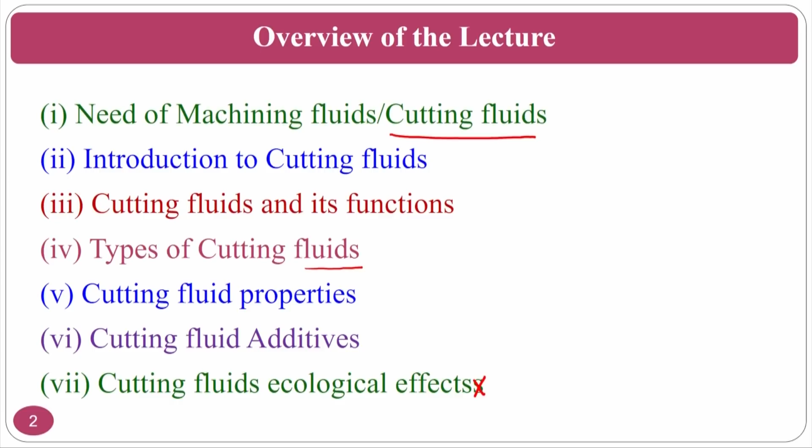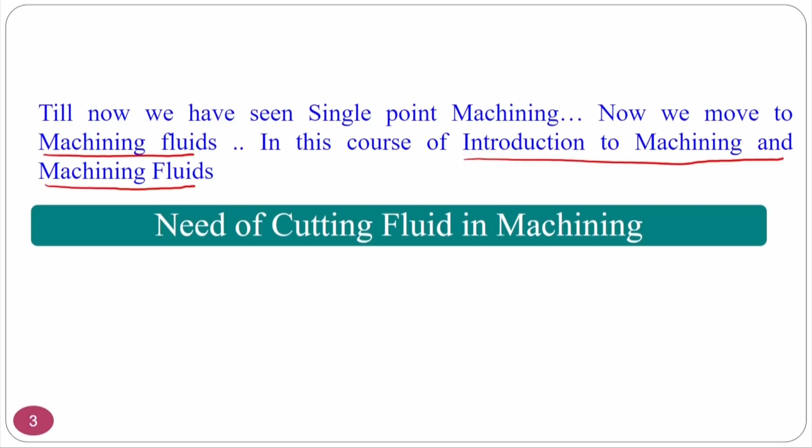So till now we have seen the single point machining tool, and now we are moving to machining fluids. As I just said, this course itself is titled introduction to machining and machining fluids. So it is my responsibility to give you slightly extra knowledge about machining fluids compared to how a mechanical engineer or manufacturing engineer looks at that perspective.

Need of cutting fluid in machining - what is the need of cutting fluid in machining? The basic problem in machining is heat generation. As we have seen the thermal aspects of machining, during machining of metals or non-metals, considerable heat is generated when mechanical energy converts into heat energy.

Severe plastic deformation takes place - you can see this is the primary shear zone, where severe plastic deformation is taking place and mechanical energy is converting into heat energy. So there are three zones where heat generates. One is heat in the shearing zone, which is the major amount of heat generated.

For which you are using the cutting fluid to extract the heat. Heat in chip-tool interface - we have already seen heat takes place at the chip-tool interface because of two things. One is the chip carrying the plastic deformation zone's temperature, and at the same time, frictional heat between the tool rake surface and chip bottom side also causes heat.

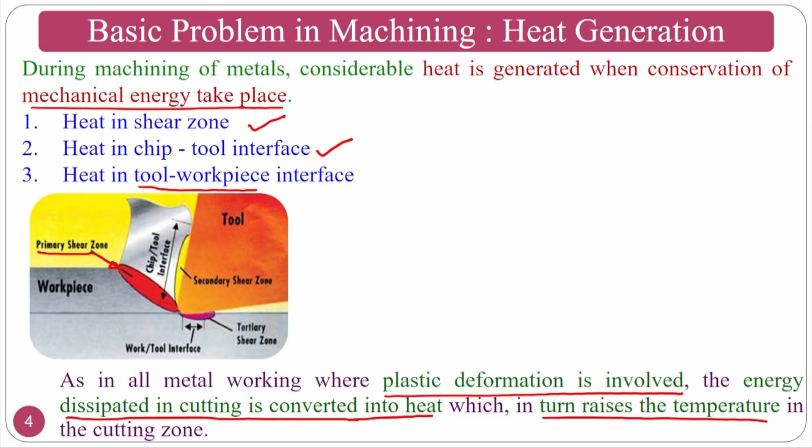How does it raise? I might have already shown this video, but since it is an apt video for this cutting fluid application, I will go and show you again. You see how the fireworks take place in this one.

If you see here, what is happening is the machining is taking place at extreme conditions on a hard workpiece. What is happening here is, if you see in this video, a lot of heat is generating. Not only is heat generating, but the chips are coming like firing bullets.

At the same time, there is an accumulation of hot chips, which is a continuous chip in that location. That is very harmful because your final product is coming in this direction. If a chip is entangled there, it disturbs my final surface roughness, plus it also gives heat input because the chip is red hot, giving heat to the workpiece, which damages the microstructure on the surface. That is two disadvantages. How to overcome all these things, we will see in the cutting fluid applications.

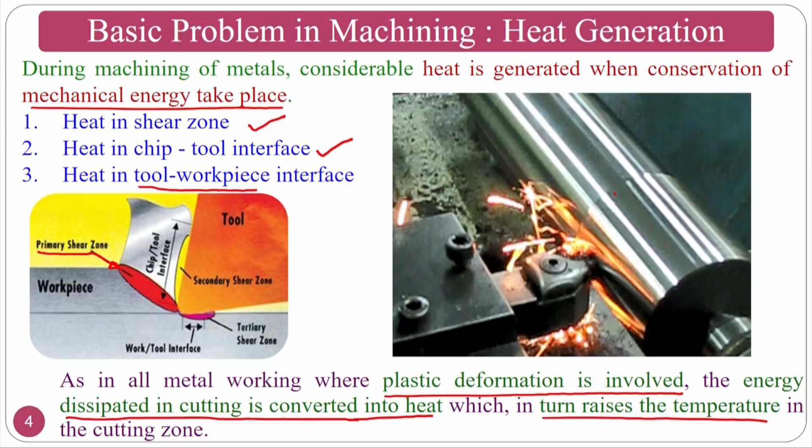At the end also, the same thing is clearly visible - there is a continuous red hot chip there. If these type of chips are present, this disturbs the surface morphology as well as the metallurgy, which we have studied in last week's courses. How do we eradicate or minimize all these things?

For that purpose, we will use cutting fluids, or you can go for another alternative. You can go for hard cutting tools, which may increase the cost of production. So the cheapest or most economical way to go ahead is cutting fluids. That's why there is a need for cutting fluids.

Proper methods are needed for these type of things - how you have to utilize the cutting fluid. You cannot throw it like a mad person; you should usefully utilize it, thinking about how to send it. If you see here, figure A is a good way and this is the poor way. Why? The heat is generated in this region where the chip-tool interface is there. At the same time, in the good way also, if it would have been done at certain degrees...

Recent studies show that if you send it at 45 degrees, that will be better - this was conveyed by some researchers. So it may be better. Whatever is given is good, but what you can go ahead with is better. So this would be better. I am not saying the best, but it would be better.

The poor way - why is it poor? Because the cutting fluid is falling ahead of my machining region, which is not required for us. At the same time, if you see in the good way, there is cutting fluid application from the flank surface side also, where the workpiece rubs against the clearance surface, flank surface, or relief surface.

Here, what you normally send is a lubricant-based cutting fluid, sent to the flank surface. In the good one, at the chip-tool interface, you send a coolant type. This is because temperature extraction should happen from the top side, and abrasion is dominating on the bottom side. That's why you always go for a better lubricant, so that lubrication is done, as you have seen in the tribological lubrication and all those things.

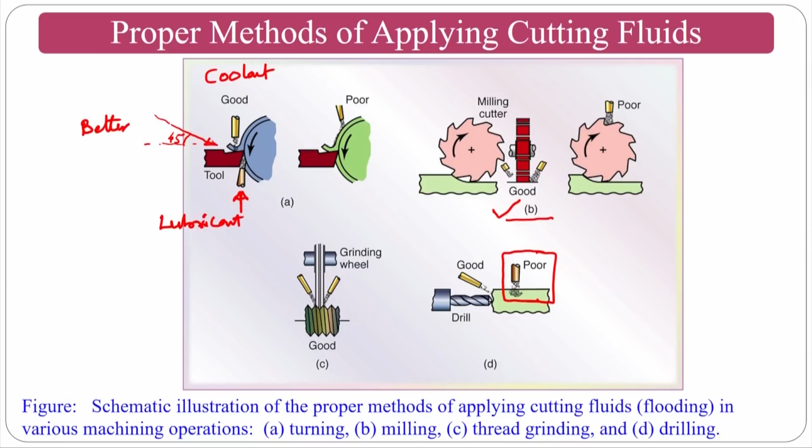So if you can send through the flutes or in the machining region, what will happen? It will lubricate, it will cool, as well as an additional effect in the drilling process is it will try to evacuate the chips. That is the beauty and the third function of the cutting fluid.

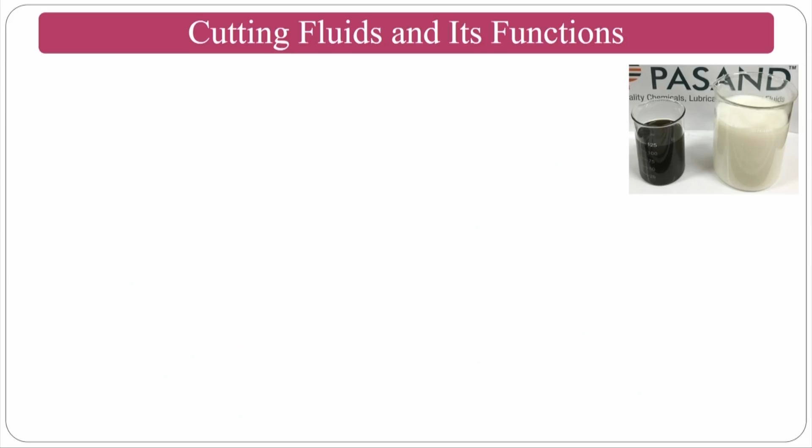In detail, functions we will come across in this lecture about the cutting fluid and its requirements and all those things. As I was just telling, now we come across the purpose of the cutting fluids, and they are none other than its functions.

So the first and foremost function normally depends on the manufacturing process that you are choosing, either it can be lubricant function or coolant function. This has equal choices or equal importance basically, because if you are going for low speeds, lubricant type is required. If you are going for high speeds, normally the coolant type is required.

So lubricant type normally will reduce the friction and wear in the machining region, about the tool.

If at all I am using the coolant, what will happen? It will cool the machining region. That means it will try to cool the chip, it will try to cool the tool, and it will try to cool the workpiece also, which is carrying a certain amount of heat.

So if you are cooling and doing all those things, what will happen? The other benefit that you are going to achieve is reduced forces. If you reduce the forces, the energy consumption will be less. That is Fc into V, normally it will go down. So your energy requirement or power input will obviously go down.

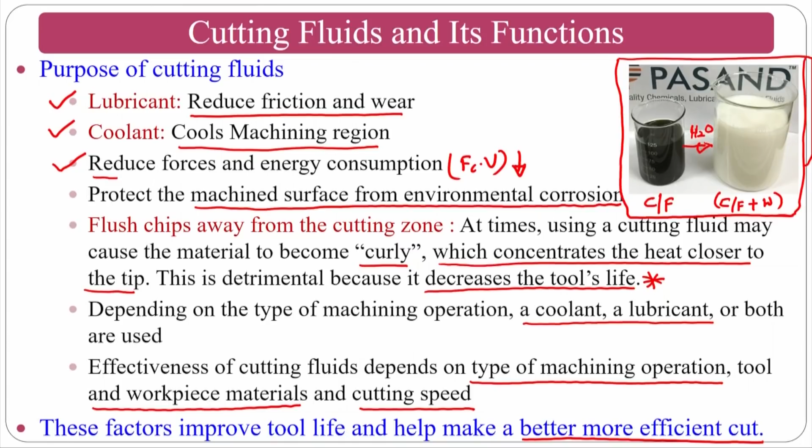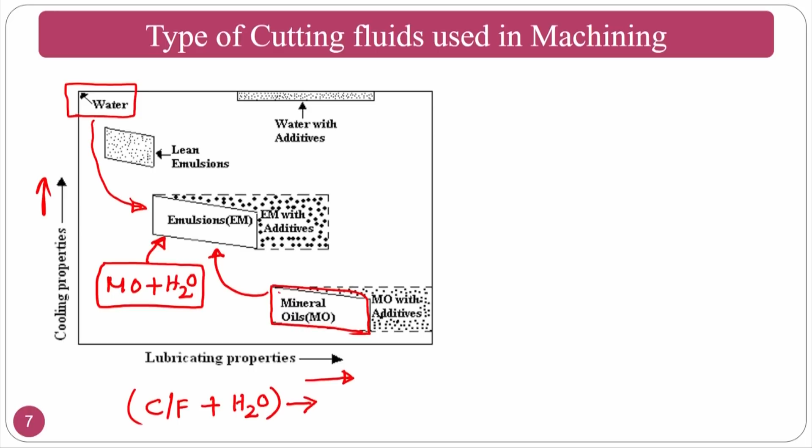Just now I told you, if you have a cutting fluid, you always add water to it. Whenever you are adding water, you are improving the cooling properties. Why? The proof from the literature is that water is a better cooling property liquid, and mineral oil - or the lubricant you get from the market - is a better lubricant. So if you want both, you have to make emulsions. What you do is take mineral oil and add H2O to it, and you are going to get emulsions, which will have optimum cooling properties as well as optimum lubricating properties.

This will have cooling properties plus lubricating properties, both. If you choose mineral oil, it will have a lubricating property. If you choose water, it will have a cooling property. That's why, to optimize both things, if I require both cooling and lubrication in my machining operation, then I am going to use emulsions.

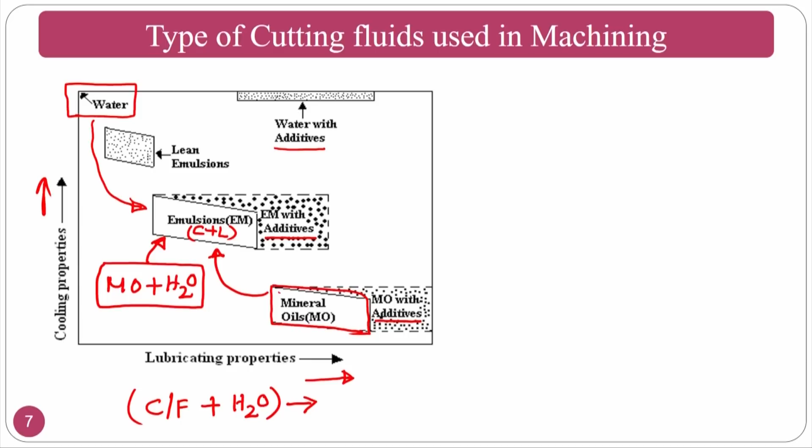Cooling plus lubrication - so emulsions contain water. If emulsions contain water, whenever high temperature machining takes place, the water will react with iron-based workpieces and cause rust. For that purpose, you always add some additives. You can see here, there are always additives - mineral oil with additives, emulsions with additives, water with additives, and others. What are these additives? That is the major thing we are going to see here.

Some of the additives are biocides, which help prevent microorganisms. Rust inhibitors help prevent rusting, as we have seen in the previous slide. Anti-wear additives help with better lubrication. Extreme pressure additives, at extremely high loads, provide lubricity for proper lubrication. The pressures are much higher in broaching operations and other processes. How additives help for better lubrication at those pressures is what we will see.

Regarding this, as I said, we will see this slide again in upcoming classes, because this graph has great importance from the point of view of lubrication as well as cooling.

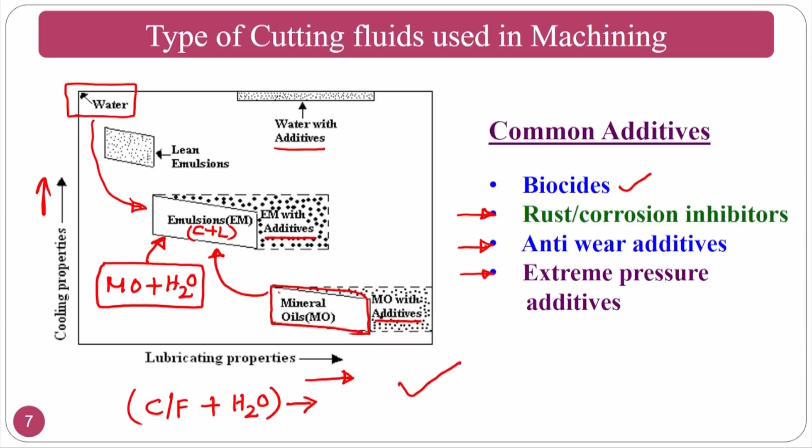The cutting fluid types - normally one is the oil type, where you see petroleum. Nowadays companies like Servo supply Servocut, which is one of the oils - these are all mineral oils. Animal, vegetable, compound - a lot of oils are there. Then emulsions - I will show you the emulsions. Emulsions are nothing but the mixture of oil and water along with additives that you have seen in the previous slide. They are good for operations where the temperature rise is significant, because they also cool.

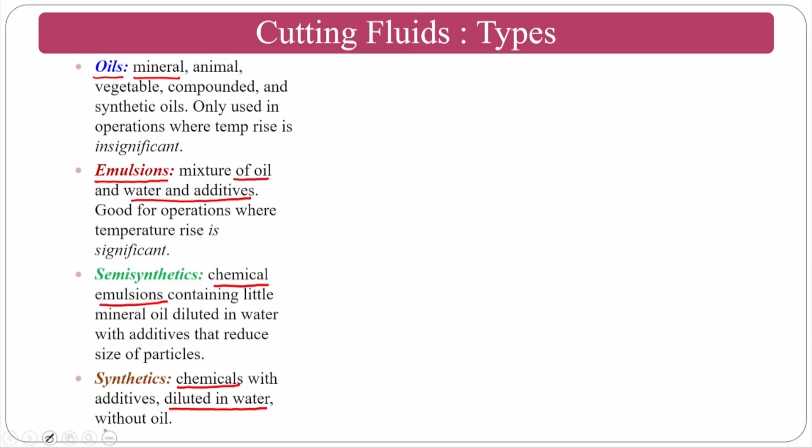Semi-synthetic fluids are chemical emulsions containing mineral oil diluted in water with additives to reduce particle size. The earlier ones are mineral oil based or water based emulsions. These semi-synthetic ones use synthetic chemicals with additives directly, along with emulsions, and you can even dilute with water or without oil.

So if you see the range of cutting fluids, as shown in the previous slide, water is a better cooling fluid. Soluble oils normally mix easily with water, that's why they're called soluble oils.

Straight oils normally have a very large chain, compared to small or medium chains, with chemical compositions like alkanes, alkenes, alkynes. If the chain goes beyond C30, the main branch dominates while the side branches are not as dominant. These types of oils are one kind of straight oil.

Mixed oils are where you can mix two to three varieties of oils. Chemical additive oils, as I said, are semi-synthetic, where you add chemically synthesized oils along with mineral oils and chemical compounds directly. Synthetic oils are completely chemical compounds where you can add water to make a slight emulsion.

And there are solid lubricants, which are normally nanoparticles or microparticles, used along with compressed air.

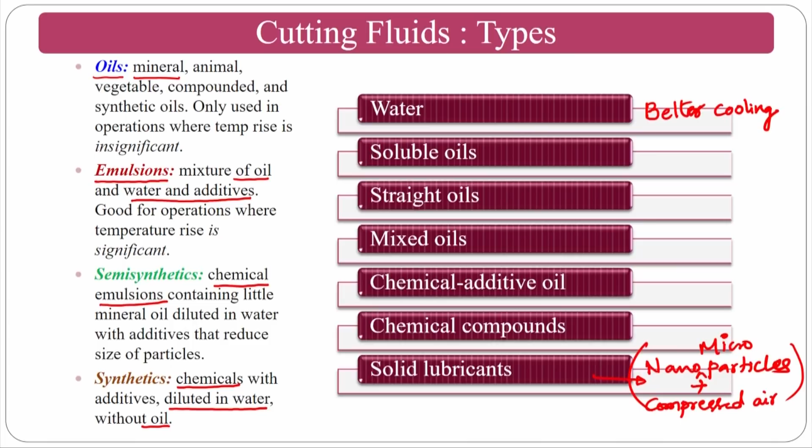With this, you send it to the machining region and get the lubricant effect. Here, the lubricant action is dominant compared to the cooling action, so whatever cold compressed air you send will be better. So whenever someone wants to do research in this area, you can use solid lubricant along with cooling fluid, that is cooling gas or normally air.

Cooled air can be impregnated with solid nanoparticles, which are better lubricants, and sent to the machining region. Your cooling fluid will extract heat because it's at low temperature, and being air, it can penetrate into the region. Very little work has been done in this area.

So people working on solid lubricants for machining applications can try low temperature, high pressure air mixed with solid lubricants, send it to the machining region, and check the results. You can even compare with normal air, and vary the solid lubricant particles as well.

Sometimes the problem is that whenever you go for nanoparticles, agglomeration is an issue. So you have to optimize the particle size, the volume or discharge of particles you are sending, the temperature of the air fluid, and the air pressure, all of which affect the volume discharge. There are a lot of interaction factors involved.

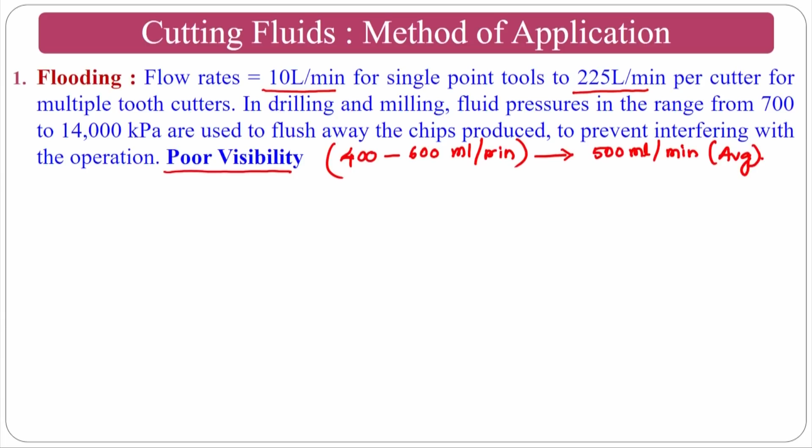Okay, so the basic problem is poor visibility. As you have seen, the cutting fluid is extremely milky type, so it will cover. If the fluid content is very high, you cannot see the machining region. That is the basic problem. At the same time, when cutting fluid is very high, emissions are also very high. Whenever you see in the next classes, you will really see what the basic problems are.

So the second one is the mist cooling, where you have a better visibility. What I mean to say is, better visibility doesn't mean it is transparent or something. Here you will mix the cutting fluid with gas and send it atomized, as you have seen in MQL, one of the synonyms for minimum quantity lubrication, where you send air plus cutting fluid and circulate it into the grinding operation or machining operation, any type of machining operation. This is the most popular one nowadays. Abroad nations are following it, and hopefully some companies in India are following it too, where good visibility is there, so people can see what is happening in the machining region and whether tool wear is taking place, and how the progress of tool wear is taking place and all those things. Some things you can see, if not 100%.

So the third one is high pressure systems, that is, if you want to send the cutting fluid with high pressure, normally you will go for this one. Here the cutting fluid consumption will be very high, even compared to flood cooling. Your flood cooling, I said 400 to 600 ml; here it may even cross 1 liter. And the beauty about this one is, if you are sending a liquid jet with high pressure, the premature chip coming from the machining region may break. That's why it will also act as a chip breaker. That is one of the advantages of this high pressure liquid jet that you are sending. At the same time, it will also clear the debris, if there is any formation in the machining region or in the chip-tool interface and all those things. This is the additional benefit one can get.

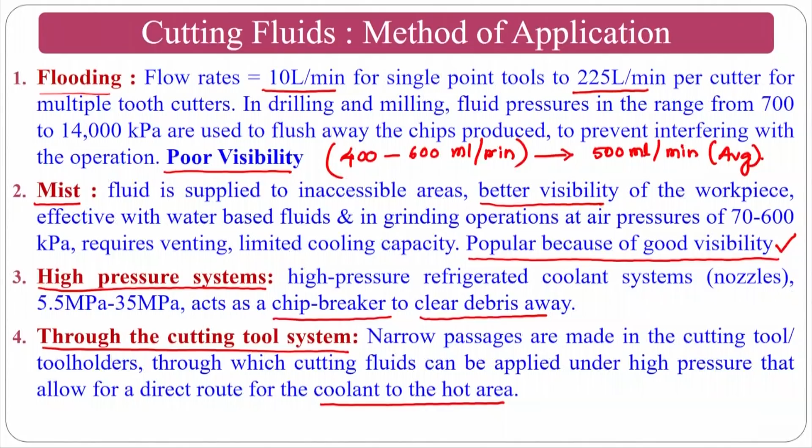Okay, these are the 4 techniques: flood cooling, mist cooling (that is minimum quantity cutting fluid or minimum quantity lubrication), high pressure systems (that is high pressure cutting fluid application), and through the cutting tool system. As I said, the through cutting tool system can normally work with high pressure cutting fluid systems only, because the narrow holes made on the tool as well as toolholder require a certain pumping system which you fit externally. Okay, so that is what you want.

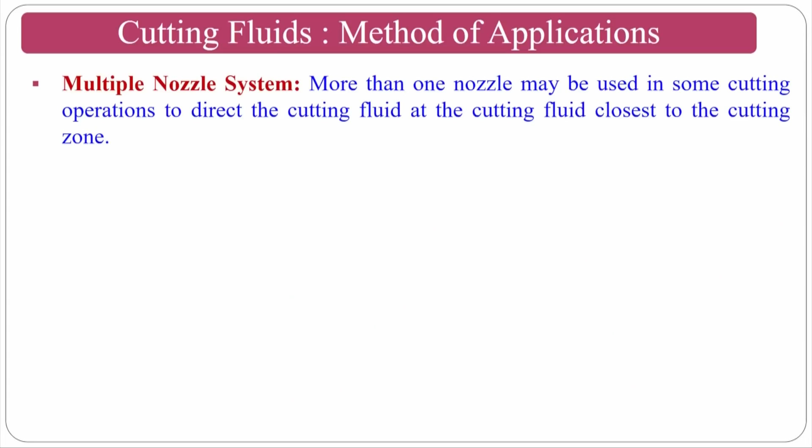So, methods of application: if you see the multiple nozzle system, normally this is another way of system. Since we have seen 4 systems, if the machining is for a long time, and if you are cutting large structures like aerospace structures or other big structures, there you normally require multiple nozzles to cool your tool. More than one nozzle may be used for some cutting operations. So that is what you can see here, a single nozzle system, and you can see a multi nozzle system, normally depending on your cutter size also. Whenever you are cutting very big aerostructures, like plane wings and those things, there you require the tool should not break at the middle or something, so you need multi jets. Not only that, whenever you cut advanced materials, normally you require multi jets.

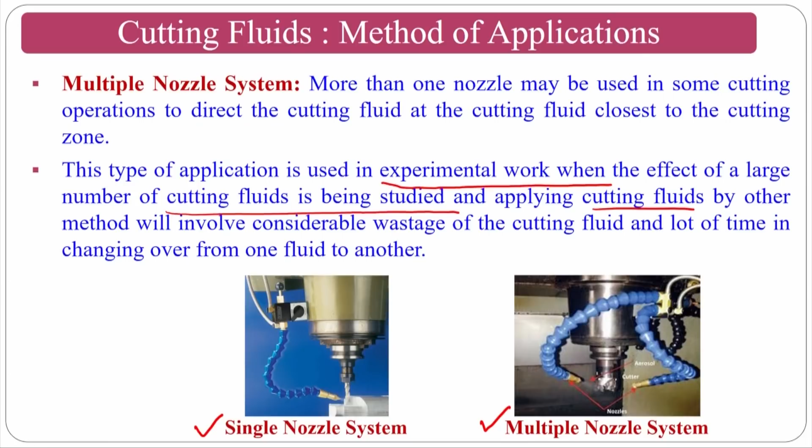This type of application is used for experimental work, when the effect of a large number of cutting fluids is being studied and applied to the tool. This is one of the techniques; apart from that, nothing much to it, only that multi jets are there. If you have different types of cutting fluids, you can also try so that a mixture of cutting fluids will be there. This has nothing to do directly with the main setup, but I am just guessing and explaining that if you have multi tanks and multi pumps where the nozzle is an individual entity, you just pump different types of cutting fluids, and you can get the forces, tribological aspect, surface finish and all those things. That also can be taken up as research, and you can do it.

Okay, so some special considerations are there. If you are machining certain materials, you should not use this type of chemicals. If you are using this type of chemicals, use them in a closed system, don't use in an open system, because it will affect things. There are special considerations to keep in mind.

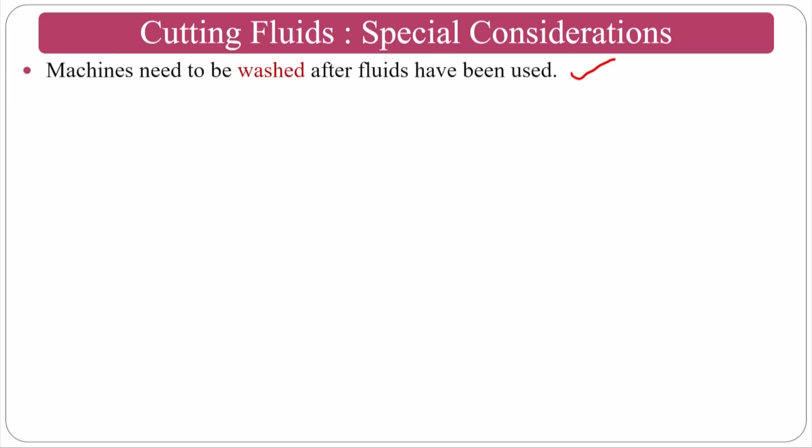Machines need to be washed after the fluids have been used. This is a primary requirement, because cutting fluid viscosities differ between fluids. If the cutting fluid has a very high viscosity, it is very difficult to wash off, so you need regular washing. If I have taken my lunch, I have to clean my plate as soon as I complete it, so that it is easily cleaned. If you clean it after 1 or 2 days, what will happen? It will dry, so it will be very difficult to clean. That's why you should wash as soon as you use it.

Cutting fluids may undergo chemical changes. Cutting fluids are normally mineral oil based, which are chemical compounds or carbon compounds like alkene, alkyne. Whenever these fall in the high temperature region, chemical cracking takes place, and the fluid's originality is lost. Its cooling property and lubrication property will be disrupted, because it changes its chemical structure.

Settling, skimming, centrifuging and filtering help to avoid these bad effects. If you can filter it - assume that while machining is going on, machining particles will come in contact with the cutting fluid and have a chemical reaction with it. That's why you should always have some filtering, and you can even use centrifuging to separate the particles out.

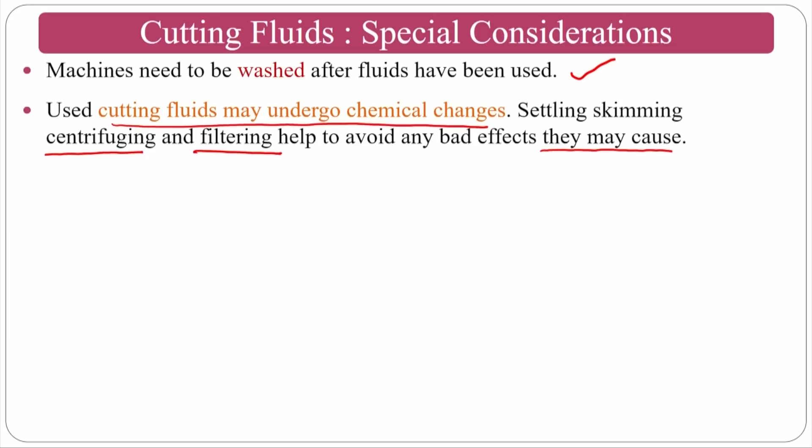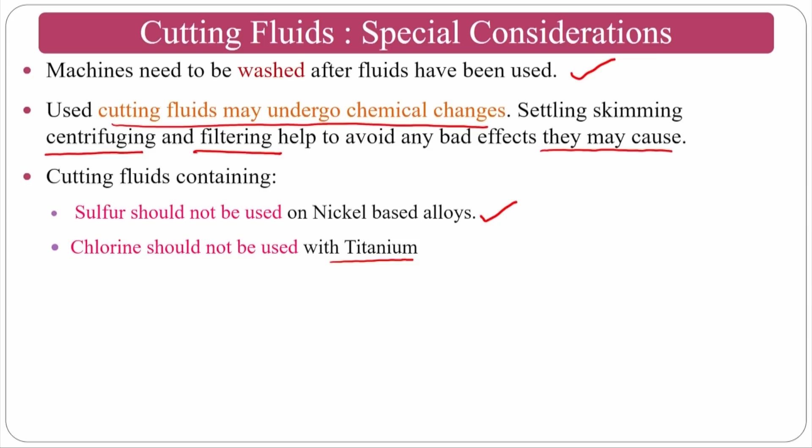Cutting fluid containing sulfur should not be used for nickel based alloys. This is one of the precautionary indications that cutting fluid suppliers will always give. If I want to machine nickel based alloys, they will give a different cutting fluid. Chlorine should not be used for titanium, because there is a chemical affinity between these two that causes a reaction. That's why it is normally preferred not to use chlorine with respect to titanium.

Situations in which cutting fluids are harmful are normally interrupted cuttings. In interrupted cutting, there are thermal shocks and mechanical shocks. So the cutting fluid may not act properly, because it has a sudden quenching effect on the cutting tool, but the sudden thermal shocks cause temperature to increase and decrease instantaneously. That is one of the reasons.

Apart from this, there are other reasons some textbooks give. In interrupted cutting, you normally have to use some other cutting fluids, which may cause the chip to curl, thus concentrating stresses closer to the tool tip. Sometimes it will cause this - if the chip is curling there itself, your nozzle direction or sending direction should not assist the existing curl. This concentrates heat closer to the tip, which reduces tool life.

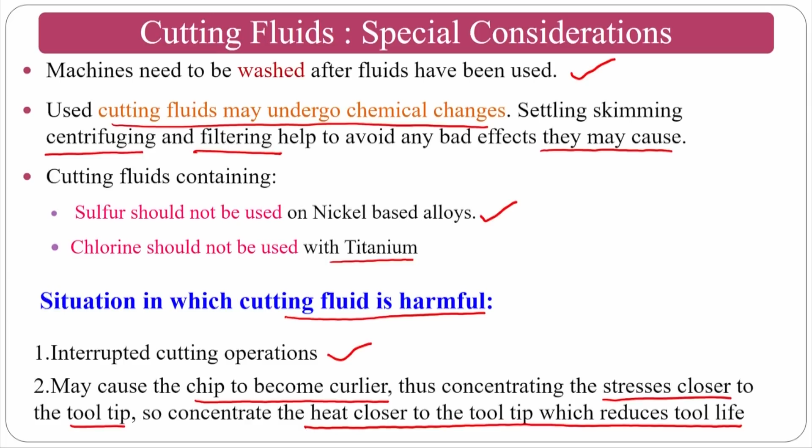So what I mean is, in these two situations, you should avoid bringing thermal shock or mechanical shock while also impinging fluid at very high velocity, because it will have an erosion effect. Another situation is if my chip is curling there itself - if you assist it by putting the cutting fluid in the wrong direction, it is not good. You should direct it such a way that it lifts off and sends the chip out. That is most important.

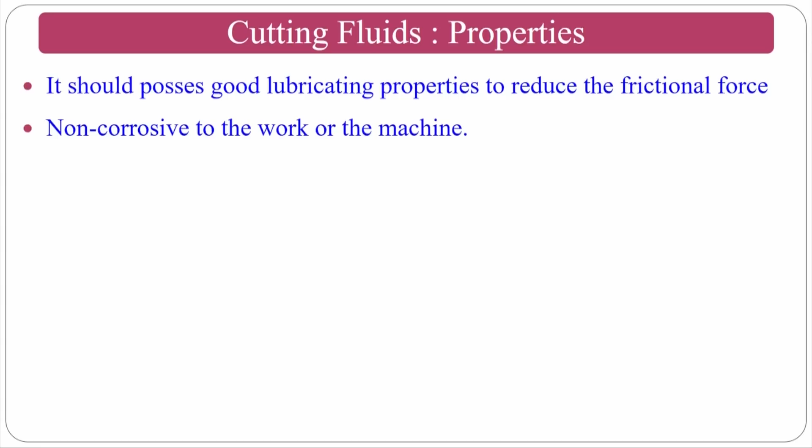Now we will look into the properties. What are the properties that I am looking for? It should possess good lubricating properties to reduce friction, which we have seen. Non-corrosiveness - that is, rust inhibitors should be built in whenever suppliers of the cutting fluid supply it - and it should be natural, so that it does not react chemically. So it should be as natural as possible.

Why am I telling you this? In some papers, people are using coconut oil, castor oil, and palm oil. Palm oil based cutting fluid papers you can see from Thailand and Malaysia - many people are working in this area. Jatropha oil is another oil that people are working with. So why aren't many people in India also working on this?

So you go through the literature and find the combination of these oils, or combination of these oils along with the water, or can be mixed with mineral oil, because mineral oil has a better lubricity. If the cooling ability of this one is better, then why don't we mix along with the water? So the only thing is that you should choose the right emulsifiers which can do this.

So that most of the cutting fluid will have natural tendency, so that the chemical aspects will go down. For example, whenever you want to purchase a soap, the first thing a person who has some knowledge about soap does is rotate it at the back side and check what is the TFM of this one. Why will they check? TFM stands for total fat material, or total content of the fat, which is non-chemical.

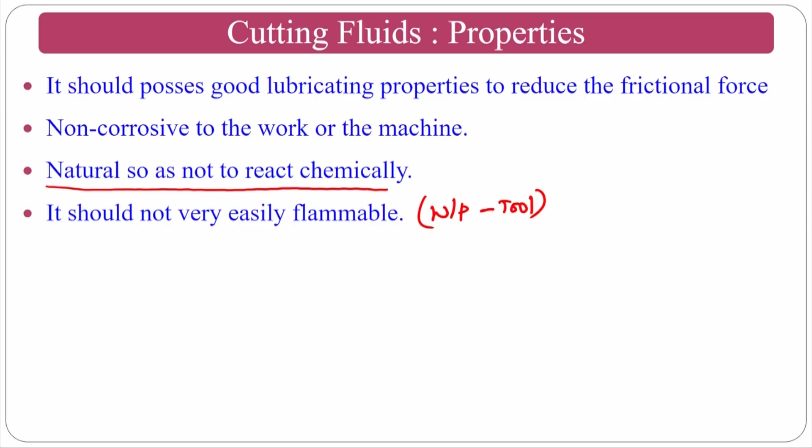It should be stable whenever you use it, and you should be able to store it. It should be completely stable, it should not age with respect to time. Any fluid will have a certain age, or an expiry date. So the expiry date should not be very low. That is what the statement says.

It should have high heat conducting ability. If it falls between my cutting tool and chip, what will happen? It will conduct away most of the heat. That is what everybody wants. Conductivity of the fluid should be very high, that will take away the heat.

It should be harmless to the skin of the operator, because the workpiece is rotating at very high speed, as we have studied in the turning process. If my cutting fluid is falling, there may be a chance of splashing. It may splash on the hands, the face, or the head, depending on the operator's position. So even though it splashes on his face, it should not harm the operator.

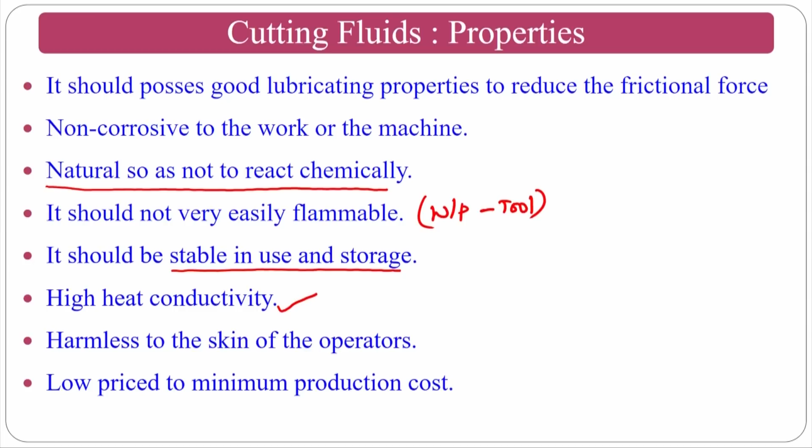Low priced, for minimum production cost. That means the production cost of this one will be less, so that you can procure it at an economic price. These are all the requirements and properties a consumer looks at whenever he wants to purchase these things.

How to choose the right cutting fluid? Which type of cutting fluid do I want, and which type do I not want? How do you choose? You choose based on which basis the cutting fluid is selected. This is just a question - so what is the basis for it?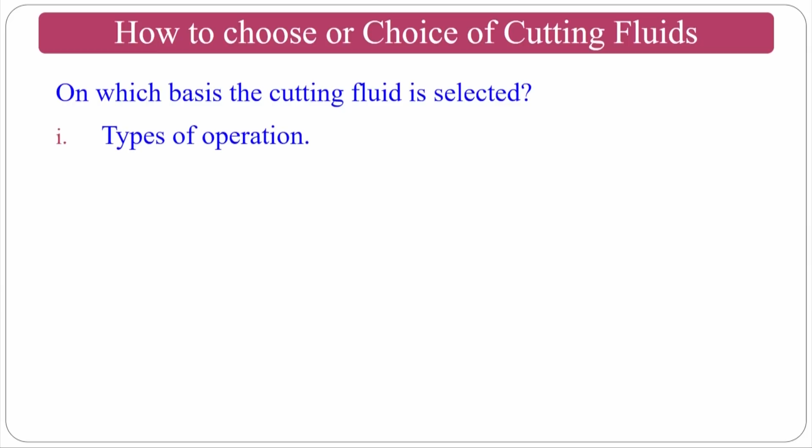Type of operation, whether I am going for turning operation, broaching operation, or knurling operation - this is one criteria. The second criteria is the rate of material removal, whether I want to remove a bulk or a minimal amount.

If I want to remove a huge amount of material, I have to choose according to it. If my material removal rate is very fast, the temperature will be very high, so I have to use coolant based cutting fluid. If my conditions remove material slowly but take a huge time, you go for a lubricant based fluid.

So the material of the workpiece - if it is very hard, the temperature generation is very high, so you have to use both the things, because it also tries to degrade the tool. So you have to choose optimally.

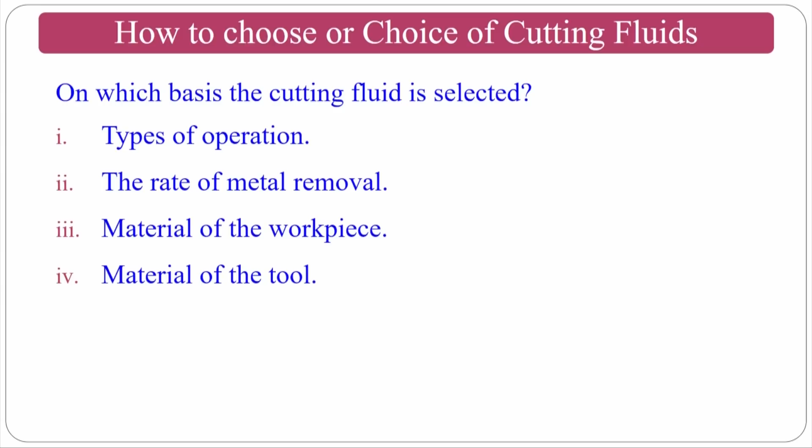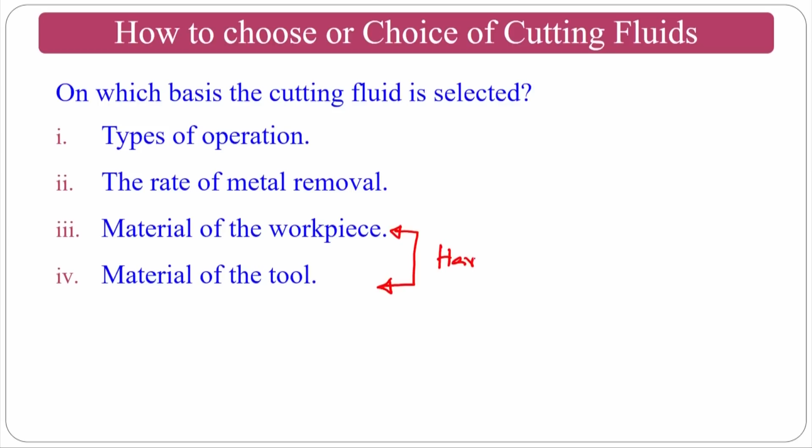At the same time, material of the tool - normally people talk about the combination and hardness ratio. Normally tool hardness to the workpiece hardness should be slightly higher. If it is higher, normally 3 times, 5 times, if it is 7 times, that will be better. Depending on this combination, normally you will choose the cutting fluid also.

Surface finish requirement - if the surface finish on my product is required, then I have to choose lubricant dominated fluid, because the lubricant helps reduce abrasion between my flank surface and my final product.

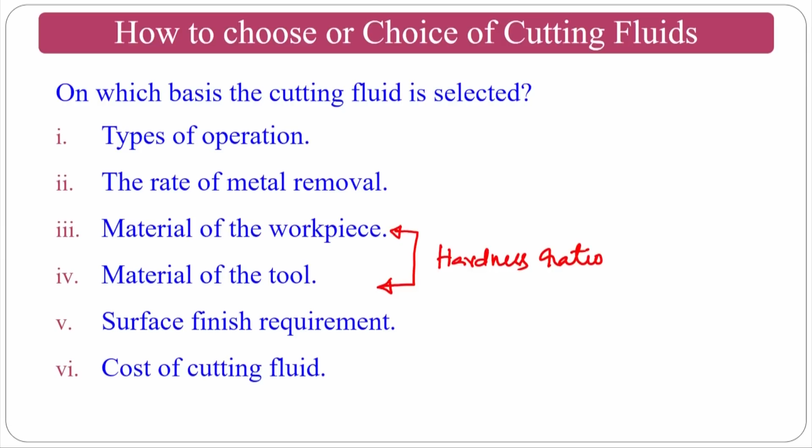Cost of the cutting fluid - whenever we go to the shop, you see 3-4 options and their cost, and whatever fits your budget you will purchase. So even though the cutting fluid is very good, if the cost is too high, the production cost will go up, and the product cost will go up. So obviously you choose the effective cost of the cutting fluid.

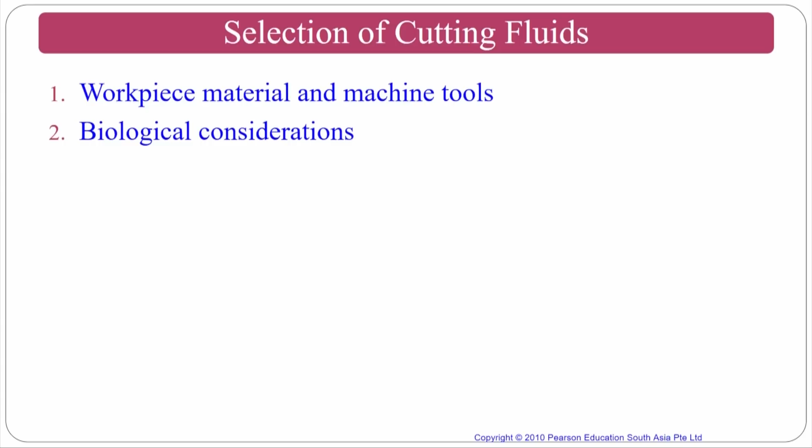Selection of the cutting fluid - how do you do? The workpiece materials and machine tools, biological considerations - you see whether it is fastly degradable or whether bacterial formation is very fast, and things like that.

And the environmental aspect - the machine tool operator is in close proximity to the cutting fluid, thus health effects are a primary concern. So for people from industries, you should not only look at the profits - it's not my intention, I'm just casually telling this.

You should also look at the safety of the operator or staff who is working. We should provide basic necessities like mask, proper apron, gloves and all those things, so that splashing won't take place. At the same time, fumes that are coming should not go into the operator's nose and cause a lot of problems. These problems I will discuss in the upcoming classes.

Progress has been made to ensure the safe use of the cutting fluid. So what are the safety precautions whenever you are using the cutting fluid? One has to ensure whenever selecting a certain cutting fluid, recycling involves the treatment of the fluid with various additives, agents, biocide, deodorizer and water treatment.

You should be able to involve in the treatment of this fluid where a lot of additives are there. The bottom line is, you should select a good cutting fluid which gives mechanical performance in a better way, as well as it should not be harmful for the human who is near to it. That is the intention.

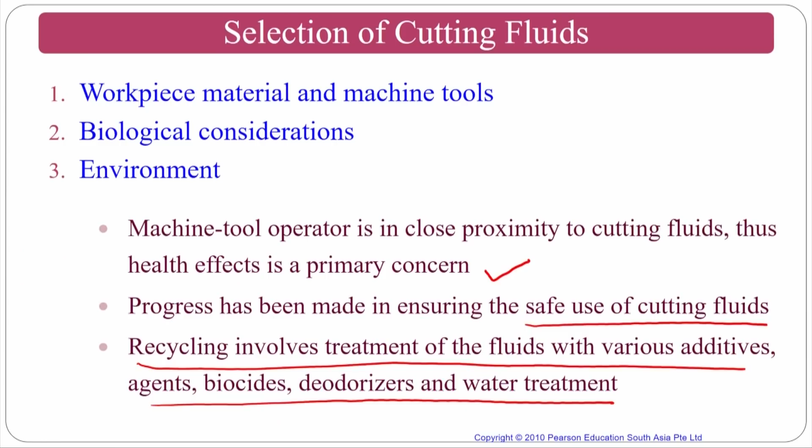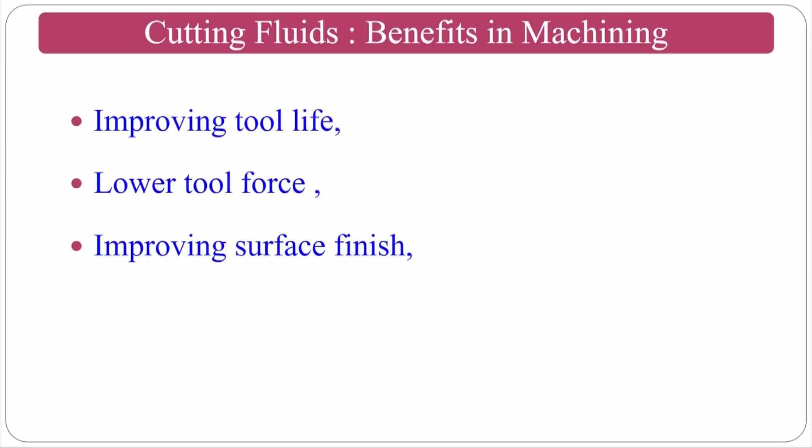So the benefits of cutting fluids in machining - it will improve the tool life, lowers the forces, improves the surface finish because the lubricating characteristics help, and finished surfaces are protected from corrosion because the rust inhibitors are part of this cutting fluid, so the corrosion will be minimum. These benefits you will get if you use it.

But the cutting fluid cost - if you see the current market, where we procure the normally servo based cutting fluids, 20 liters is around 2500 plus or minus 500, so it may range between 2000 to 3000 rupees. But for 20 liters, if you mix each liter with 10 liters of water, it is economic.

But the only thing is you have to look at it from the corrosion point of view because the water content is more. At the same time, you have to see whether harmful chemicals are emitting whenever this cutting fluid is falling in the machining region.

So this will give you good surface finish and forces will anyhow be reducing, but you can see on the other side of the coin, there are ecological aspects.

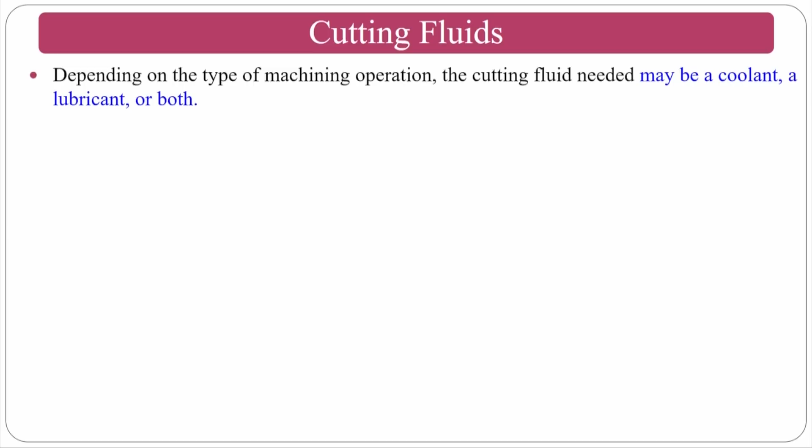Now the cutting fluid depending on the type of machining operation needed may vary, whether it is cooling or lubricant. The effectiveness of the cutting fluid depends on a number of factors such as type of machining operation and all those things.

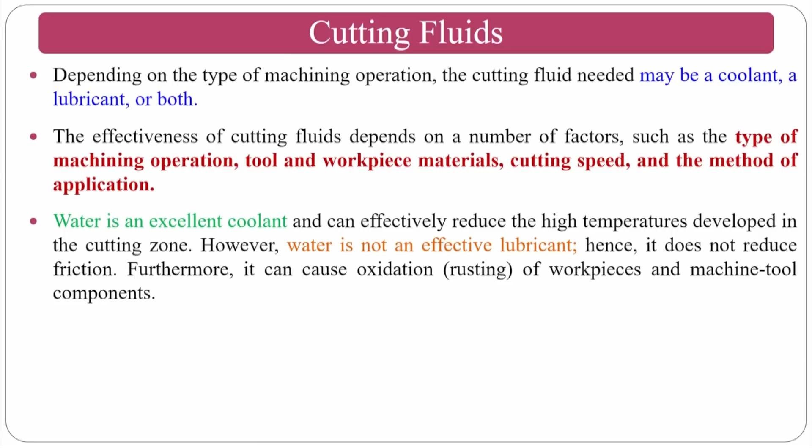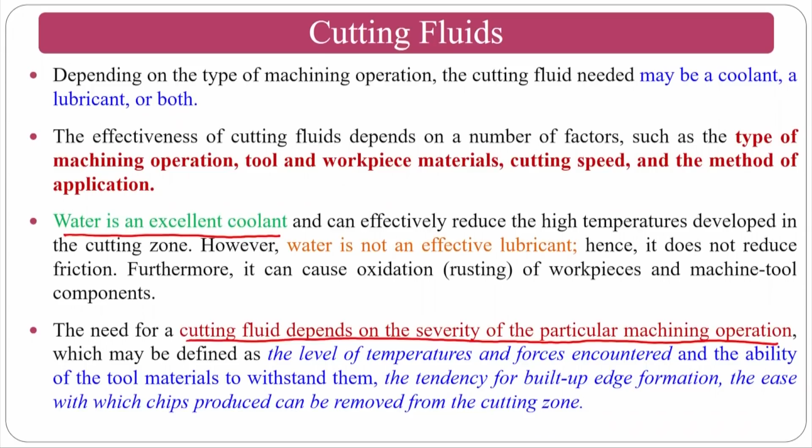As I said in the graph, water is an excellent coolant, and cutting fluid selection depends on the severity of a particular machining operation. If it is a turning operation, it is not much severe, but if it is a broaching operation and similar, it is a high pressure operation where you need proper lubrication and cooling. For that purpose, you have to use a special type of cutting fluid with high pressure additives and all those things.

Cutting fluid action - normally how the action takes place in terms of heat extraction or lubricating - is a capillary action. Cutting fluid seeps from the sides of the chip through the capillary action of the interlocking network of surface asperities at the interface. That means whenever you are sending a cutting fluid, it will go from higher concentration to lower concentration by capillary action, and it will unlock the interlocking network between chip and tool. So that is the action.

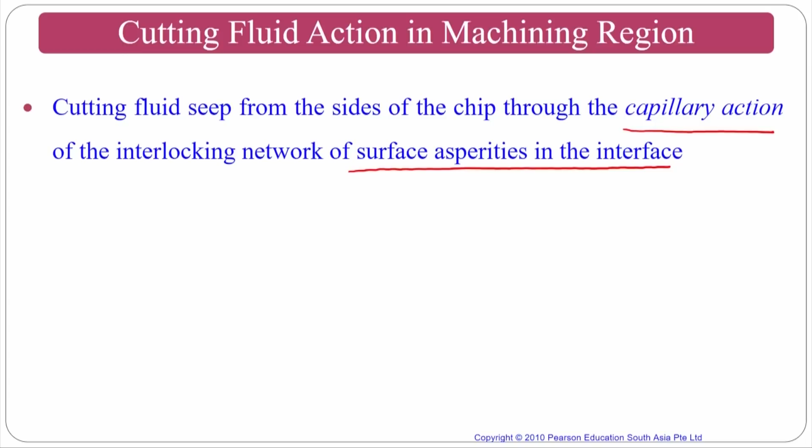Discontinuous cutting operations have more straightforward mechanisms for lubrication application, but tools are more susceptible to thermal shocks. What I mean is, whatever the above point, it holds good for continuous chips. If we are going for discontinuous chips, it is straightforward because chips are not entangling there - they become a powder form or small fragments, so proper lubrication or cooling will be done in the machining region.

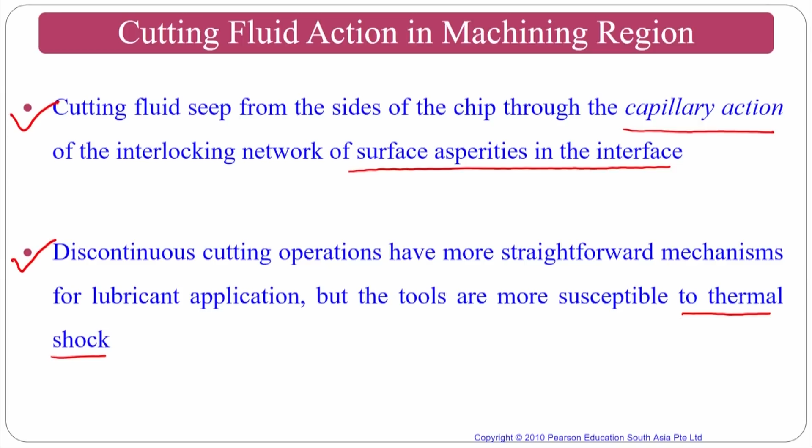However, these nanoparticles or microparticles that are forming are discrete particles, so discontinuity will be there in the nano range or micro range, which may cause shocks. So you have to take care about using the appropriate cutting fluid in this process. Normally, if I am not using the cutting fluid, what will happen?

Let me take an example from another source. A machining operation is being carried out with a cutting fluid that is an effective lubricant. What will be the changes in the mechanics of the cutting operation if the fluid is shut off? Assume I am not using the cutting fluid, but I am using turning. What are the problems the operator can experience? So this is the chain of events taking place if the cutting fluid is shut off.

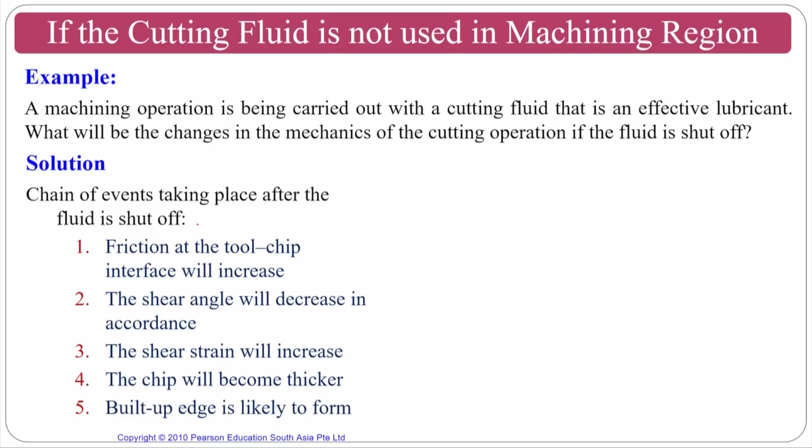What are the things? If you see, the friction on the chip-tool interface will increase, which will destroy the tool. The shearing angle will decrease - if the shearing angle decreases, what will happen? A lot of problems will come. The temperature in the plastic shearing zone will slightly increase.

If my shearing angle is small like this and it goes like this instead, what will happen? My length will increase. So if it increases, the temperature - the number of atoms in the workpiece material - will go up. So there are heat increase problems.

The shear strain will increase. Normally the strain will increase. If the strain increases, temperature increases, the chip will become thicker. As I said, the shearing angle decreases, so the chip will become thicker and a built-up edge is likely to form. If the built-up edge forms, the surface roughness will deteriorate and the tool wear will also increase.

As a result, what are the problems? The shearing energy in the primary zone will increase because I have to put in more and more energy. The frictional energy in the secondary zone will increase. If the frictional energy increases, the coefficient of friction will increase. So the total energy will increase - on average, if parts of the energies are increasing, the total energy required will also increase.

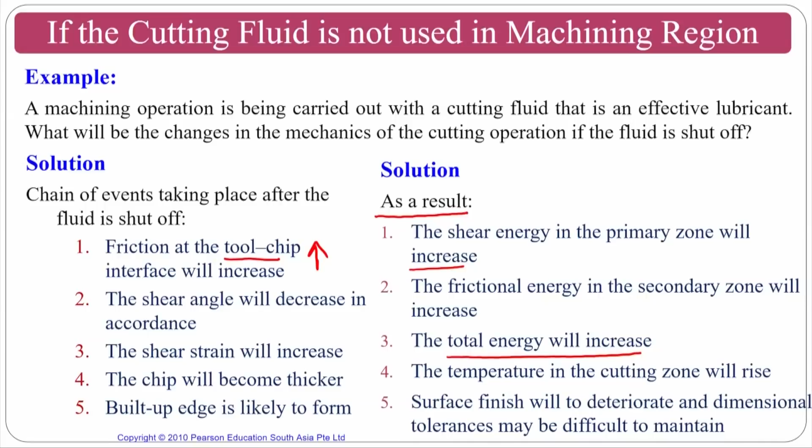Now we will move to cutting fluid additives. In this class we studied machining fluids, a major part of this course, which we will cover over a continuous spectrum of at least 2 weeks. We studied the basic problems requiring cutting fluids, the proper methods of using cutting fluid in the right direction and place during machining, and the cutting fluid functions. We studied types of cutting fluid - water based, semi synthetic, mineral oil based - their lubricating and cooling properties, and how to take care of them. We also studied various cooling types like flood cooling, mist cooling, high pressure cooling, interconnected cooling, and multi jet cooling for machining of big structures.

Special considerations we studied include that sulfur should not be used for nickel applications, and chlorine should not be used for titanium applications.

We covered some special considerations and moved to properties like high heat conductivity, so it takes away most of the heat generated during the machining operation.